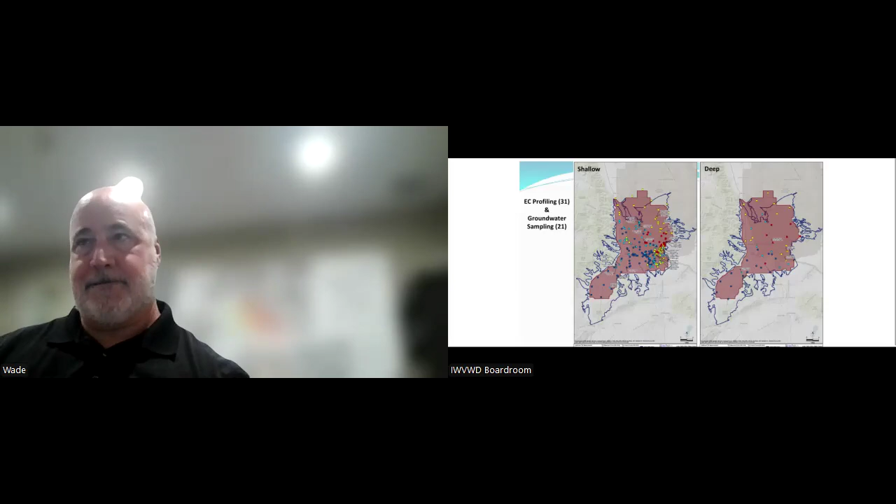We conducted 500 miles of SkyTEM airborne geophysical survey, did 10 downhole geophysical logs, conducted an aquifer test, looked at 2 industrial users who would potentially accept the RO concentrate or the salty brine that comes out of the RO system. COSO, we looked at 3 locations with 2 pipeline routes. Searles Valley Minerals, we looked at 1 location and 1 pipeline route. Next slide, please.

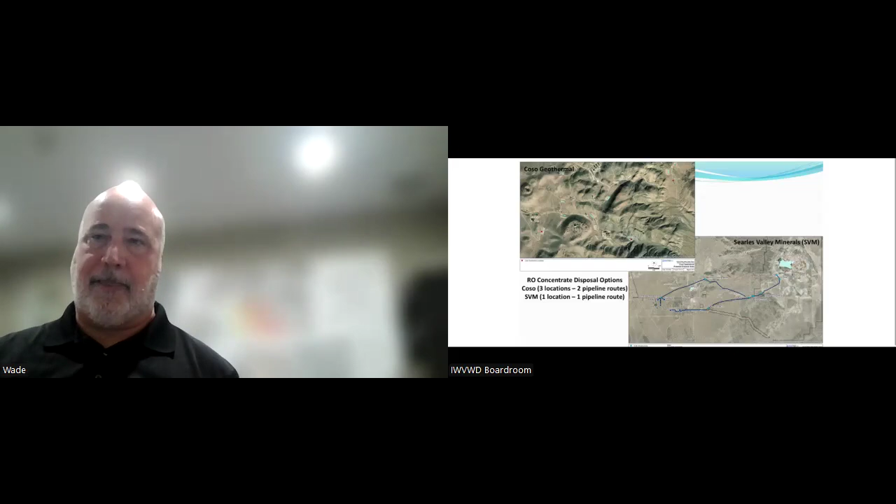We also looked at traditional evaporation ponds for disposing of the RO concentrate. We looked at 2 sizes of those, and we also looked at deep well injection. So we're really spanning the gamut here of ways to deal with RO concentrate, either pipelining it to an industrial user, putting it in an evaporation pond, or deep well injecting it. Next slide, please.

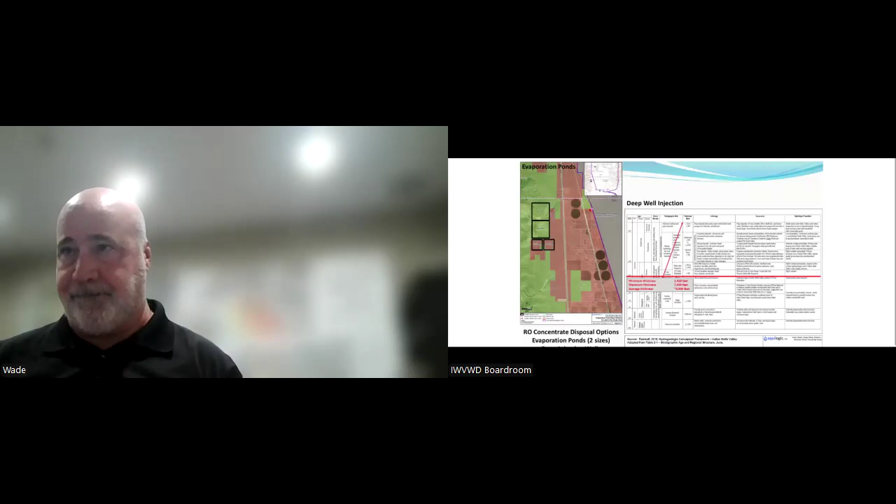Computer modeling was done utilizing DRI's MODFLOW model. What we were trying to do was target areas in the basin where we had TDS or salt concentrations greater than 1,000 milligrams per liter. 3,000 milligrams per liter is the sweet spot. That's the water that we want to target. Anything less than that is pretty fresh, and you can almost get away by blending that with fresh water to reduce the TDS concentration. So we were trying to find a sweet spot of about 3,000 milligrams per liter.

We wanted a potential system to be located away from existing production wells. We wanted it to be located where the impact to freshwater resources is minimized, where subsidence would be minimized, and then importantly, outside of the boundary of NAWS China Lake. Next slide, please.

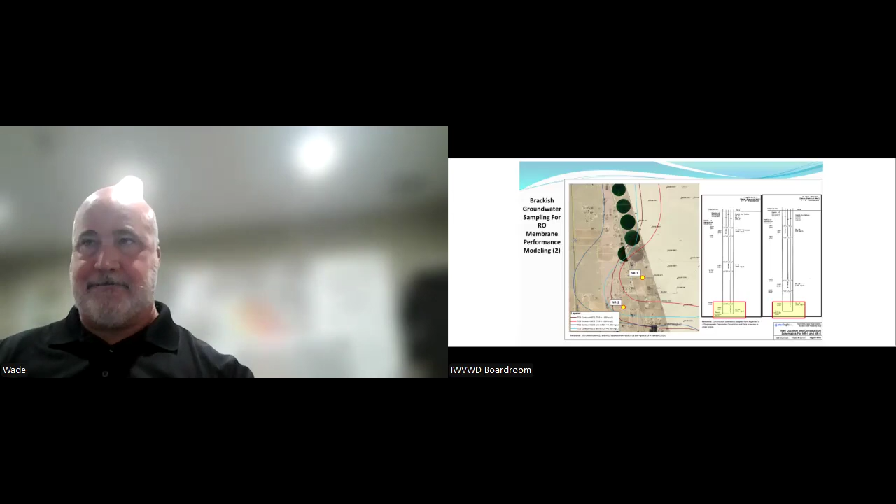We did brackish groundwater sampling so we could determine how a reverse osmosis membrane was going to perform. We collected groundwater samples from 2 existing wells, NR1 and NR2. Next slide, please. Next slide, please.

Key findings. So over the past 80 years, this basin's been extensively studied, but there's still a lack of knowledge about the deeper groundwater. There's a lot of shallow wells, a lot of domestic wells, and public supply and ag wells, but the deeper groundwater is still a bit of a mystery. A lot of these deeper wells, the ones that were installed as part of the USBR program in 1991, their diameter is too small to be able to perform useful work other than measuring water levels or at best conducting low volume passive diffusion sampling.

Collecting large volumes of water from these wells is time consuming and expensive. Purge rates are extremely low. For example, NR1D, that took 8 days of purging 24 hours in order to get the water to a point where we could collect a groundwater sample. Additionally, a number of the wells are in disrepair. The 3 wells in the USBR 10 cluster are blocked at partial depth. The NR1 3-well cluster is functional, but the screened interval is mostly filled up with sediment. Next slide, please.

Doctor, I'm sorry, is it Doctor or Mr. Major? No, just Mr. Mr. Major, could you please define for me what you mean by deeper well? So the wells, if I'm just going to pull the number off of the figure. So deeper wells are things that are 1,000+ feet deep. Thank you. And the NR1 and the USBR wells, these go down to, in some cases, 2,000 feet. So I would say deeper is anything from 1,000 to 2,000 feet. That's perfect. Thank you.

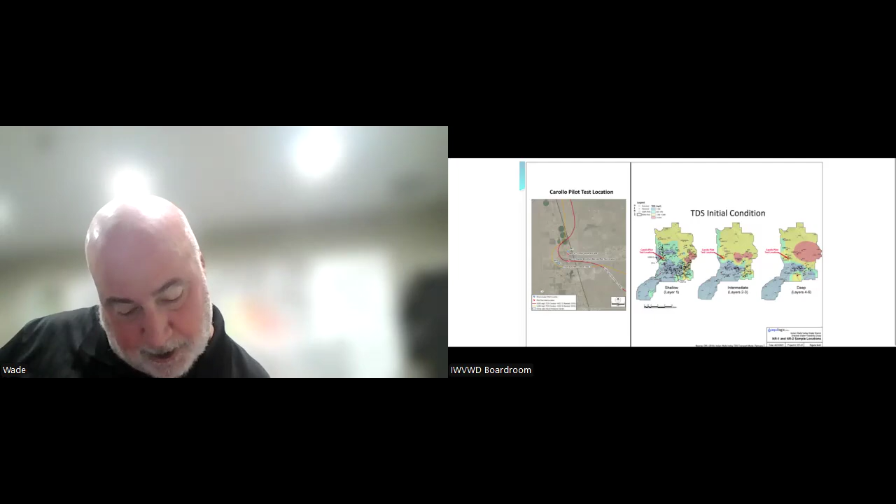Just a quick question. Yep. On the left-hand panel, you've got a yellow line, 3,000 milligrams per liter, and you have a red line at 1,000? Or am I missing that? Oh yes, so those are in different layers. They're both 3,000, but they're in different layers of the DRI model. So the red line represents hydrogeologic zone 2, which is shallower than the yellow line, which is the deeper water in hydrogeologic zone 3. Thank you.

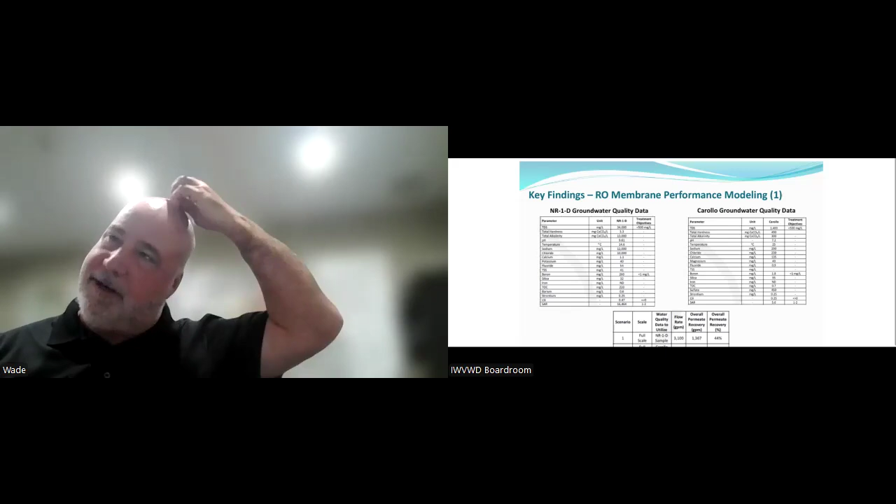Lauren, if we could go to the 2 slides to the key findings tables. That's perfect. So oh, you can't see the bottom one. We have a little bit of a crop issue here with the table. The key thing here is that when we modeled how an RO membrane performed with the seawater, we got about 44% recovery. So that is, for every 3,100 gallons you put through the RO system, you only make about 1,367 gallons of fresh water. The other 1,700 is that salty brine that you have to get rid of. So a 44% recovery is not particularly good, and that would be very typical of a seawater recovery.

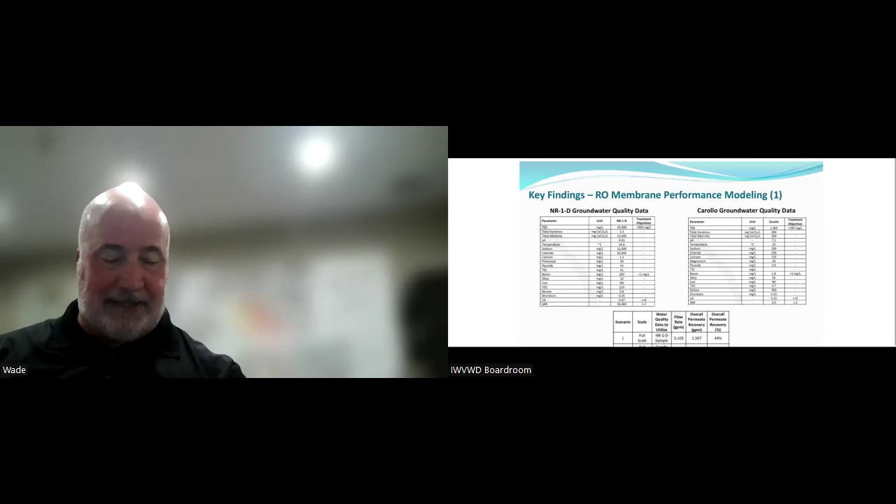The Carollo sample at 1,400, we got an 80% recovery, and that's kind of what you're hoping for in a brackish groundwater desalination project, getting 80% fresh water, 20% RO concentrate. So this sort of brackets a best case to a worst case scenario in terms of membrane performance. Next slide, please. Next slide, please.

We did 4 modeling scenarios. Scenario 1 was way up there at location 1 around USBR 10, 1 vertical well. Location 2, we concluded that on the basis of hydraulic conductivities, we weren't going to be able to extract there because of high drawdowns. Scenario 2 was at location 3, that's in the south central pocket. And then scenario 3 was back up at location 1. And finally, scenario 4 was in the vicinity of USBR 6. Next slide, please.

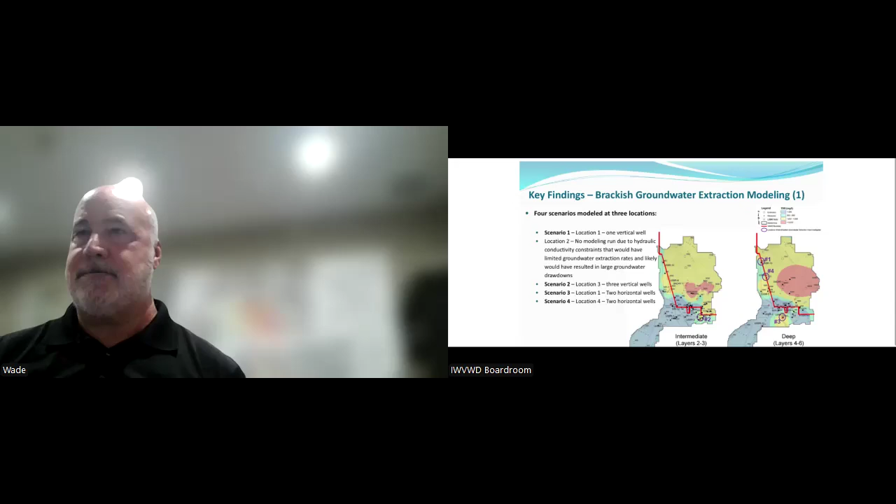Next slide, please. So what we found, there are various drawdowns in each of the scenarios, and you can see that these drawdowns varied from 60 feet of groundwater drawdown by the year 2070 up to greater than 500 feet of groundwater drawdown, depending upon the location, the well configuration, and the extraction rate.

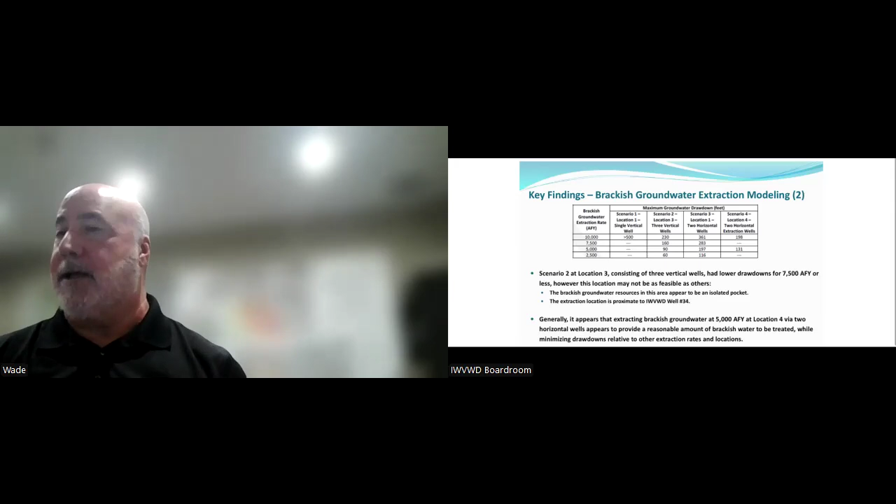Now, scenario 2 appeared to have reasonable drawdowns at 7,500 acre feet or less, but the brackish groundwater in that south central part of the basin appears to be an isolated pocket, and we're in close proximity to the water district's well number 34. So overall, it appears that scenario 4, which is 2 horizontal wells up in the vicinity of USBR 6, extracting at 5,000 acre feet per year, appears to be reasonably feasible. Next slide, please.

We then looked at the key question everybody asks: what are the impacts to shallow wells going to be? And so DWR has a criteria where if your water level in your well falls to below 80% of the total depth of the well, that well is said to be vulnerable. Next slide. So we downloaded and evaluated well completion reports in PDF format from DWR, and 857 of those wells had total depth information. Next slide, please.

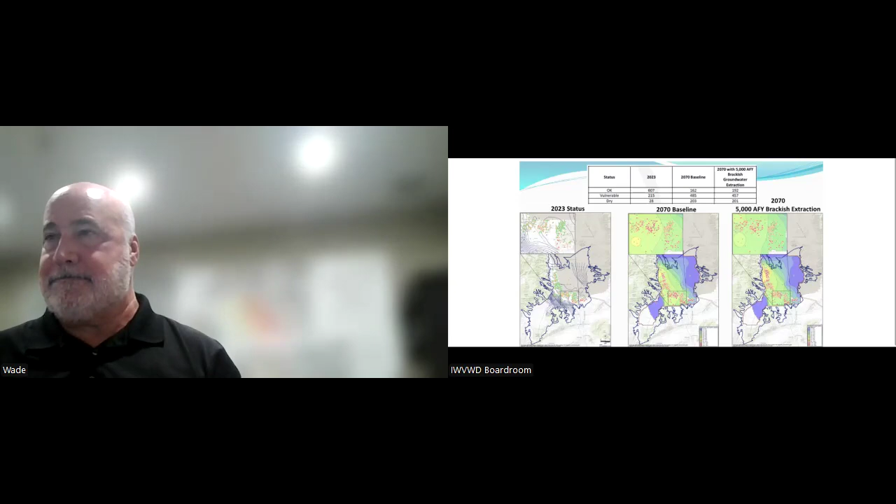And that's really what this slide shows. Triangles that are pointed downwards mean that a well status changes for the worse. The water level goes down. And you can see we've got a number of those triangles up in the area of USBR 6 where the brackish extraction scenario was proposed. But you can see the triangles that are pointing upwards in the south central part of the basin. That's where the water levels actually improve.

So because you're pumping less fresh water from those main water district wells and Searles Valley Minerals wells, you actually prolong the life and the longevity of that freshwater resource. You've got localized impacts up where you're extracting the brackish water, but you're reducing the impacts in your freshwater pumping areas. Next slide, please.

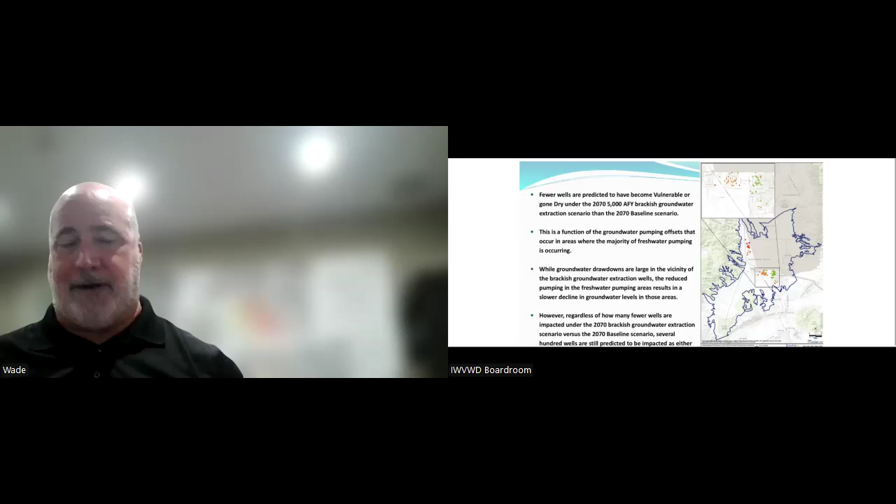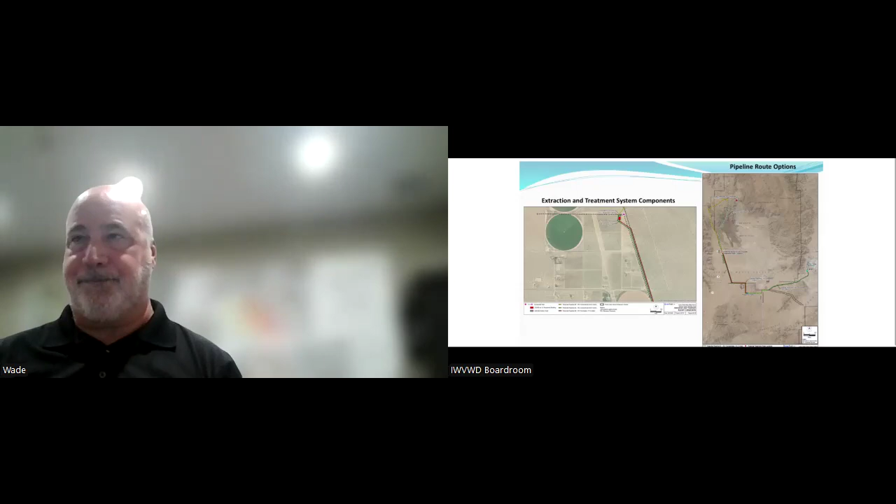And we then looked at 2 sizes of evaporation ponds, one for each of the water qualities. The larger ponds would be the seawater type brine, and the smaller ponds would be the brackish water. And you can see from the scale of this how big these evaporation ponds would be relative to the center pivot irrigation items that you see for the alfalfa of Meadowbrook Dairies. These would be massive evaporation ponds.

Evaporation lakes. Basically lakes, yeah. These are approaching some of the tailings ponds in northern Alberta at the oil sands on the basis of these sizes. Wow. Next slide, please.

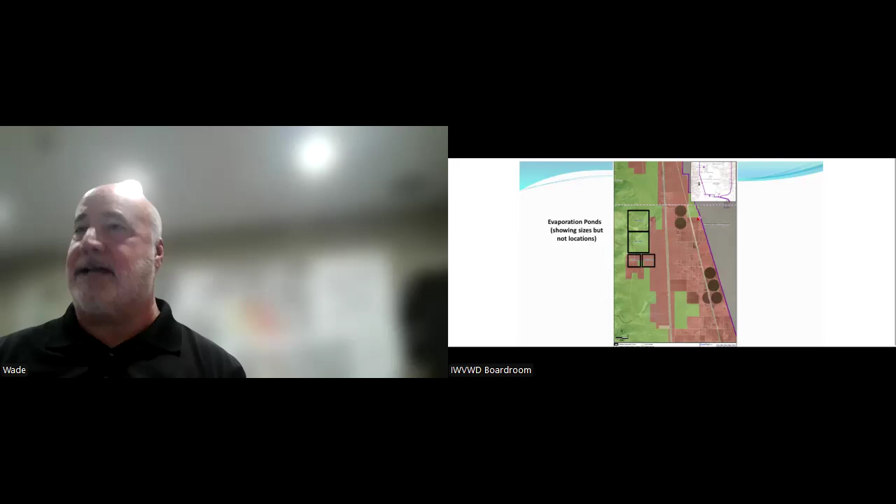So we looked at CapEx, we looked at the annual OpEx, we looked at the net present value. We did a total cost comparison in terms of dollars per acre foot over the 30-year life of the project. And then we did additional analysis to look at how much of this is extraction and treatment versus conveyance. Next slide, please.

Now, we worked up our own costs, but we also wanted to compare that to other stuff that others have done in the basin. So Stetson completed a feasibility study for a recycled water project in 2023. And they basically had 3 options that they looked at. And the third option was a subtle variation between a 2-stage and a 3-stage reverse osmosis system. So they looked at tertiary treatment with landscape irrigation, surface spreading, and then subsurface injection, either 2-stage or 3-stage RO. Next slide, please.

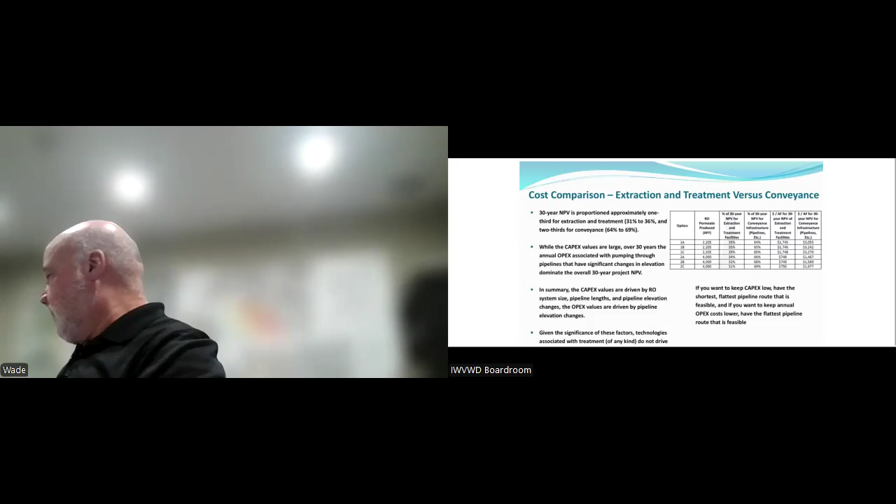Thanks, you too. Okay, item 5, Indian Wells Valley Groundwater Authority. Do you have any observations you would like to make, George? Not at this time. The meeting was uneventful last month. The most controversy in the open session was the idea of the Groundwater Authority starting its own Facebook page. There were serious objections from our friends in Inyo County. And I thought that it was unwise to put the page up and then develop the policy for managing the page while you were going live. That seemed like you might make some mistakes that would invite lawsuits. And our compatriot from San Bernardino felt the same way.

So the idea was tabled until GA staff can come up with a draft policy that could be reviewed by the legal department first. So that appears to be in the open session the most exciting part. We've been promised by April Keegan that she's going to produce a more detailed invoice to explain the monies going to the city of Ridgecrest. It's $230,000 some dollars in the last invoice. And that is really all I have to report.

Oh, we did receive the reply from the Groundwater Authority saying that, yes, they'd be happy to mediate with us. There were no other stipulations in there other than we'd like to have an official acknowledgement of the receipt of this email. So if somebody could reply to that, George, if you would, and tell them we got this and thank them for it, I'd appreciate it. Yes, sir. Okay, any questions, comments, observations? Okay, alternate water sources.